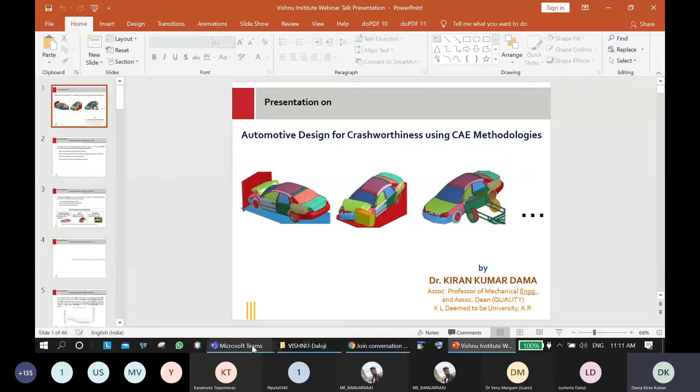Today, I'm here in front of you as a speaker to talk on automotive design for crashworthiness using CAE methodologies. Before starting this session, I'd like to ask a few questions. How many of you are having four-wheelers? Whoever is having passenger vehicles, please raise your hands in your chats. Can I see the responses? Okay, I'm not getting any response over here.

Okay, so as a normal user of a four-wheeler vehicle itself, we should know the safety rating of our vehicle. But especially as a mechanical engineer, we must know the safety standards of our vehicle, which represent the safety of the vehicle in terms of star rating. At the end of this session, we'll come to know what the star rating is and how it would be assigned to any passenger vehicle or any other vehicles.

Crashworthiness of a vehicle can be defined as its ability to protect its passengers and other participants, like pedestrians and other vehicles involved in impact. The car body structure is one of the important vehicle systems that helps in mitigating the impact loads. Therefore, appropriate design measures should be taken while designing the car body structure.

In general, design of a vehicle body structure affects the performance of the vehicle in almost all aspects such as safety, comfort, and fuel consumption. Therefore, various criteria in the field of structural mechanics and aerodynamics are used while generating the design of body structure. This makes the design process highly complex, iterative, costly, and time-consuming.

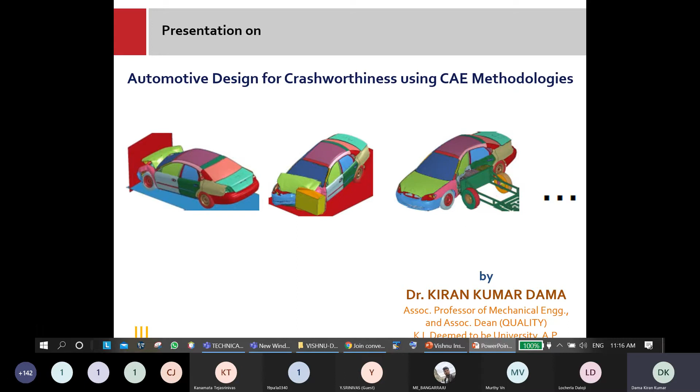Now we'll see how to design these structures. It is necessary for car body structures to possess necessary structural performance under different types of loads and thereby provide passenger comfort and safety during the entire lifespan of the vehicle. The car body should be light in weight. However, its lightweight characteristics should not have adverse effects on structural performance.

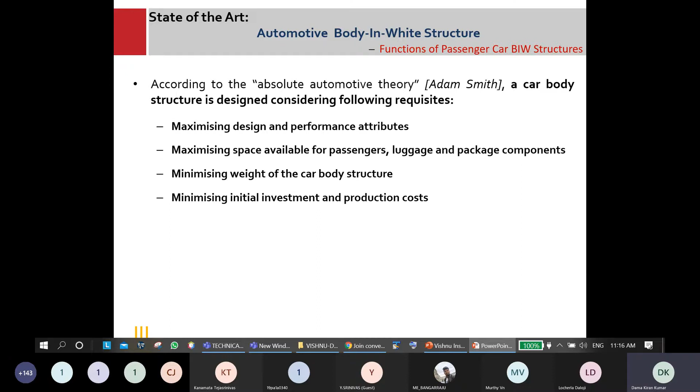The car body structure should provide sufficient space for the passengers and the luggage. The package components should also be appropriately supported by the body. The design of the car body structure should be cost effective considering initial investments and production aspects. By taking appropriate measures during the structural design of car body, safety and comfort of the passenger can be improved considerably. The structural design of a car body is realized considering the performance attributes like crashworthiness or passive safety, noise, vibration, harshness, and durability or endurance strength.

The crashworthiness of a car body structure accounts for the safety of the vehicle, its occupants, and other participants in the event of an accident. In such an event, high dynamic loads are generated within a few milliseconds. The car structure should be able to react to those in this very short duration and provide favorable conditions for the occupants. NVH deals with the static and dynamic stiffness of the car body structure and its sound damping properties, whereas static and dynamic loads are imposed on the car body structure during its operation.

Static loads are mainly of two types, bending loads and torsional loads. Bending loads are exerted, for example, from the self weight of the vehicle and the weight of the passengers and luggage. The car body is subjected to torsional loads, for example, while moving on uneven road, when all tires are not at the same level. In order to sustain these loads, the car body structure should possess sufficient bending and torsional stiffness.

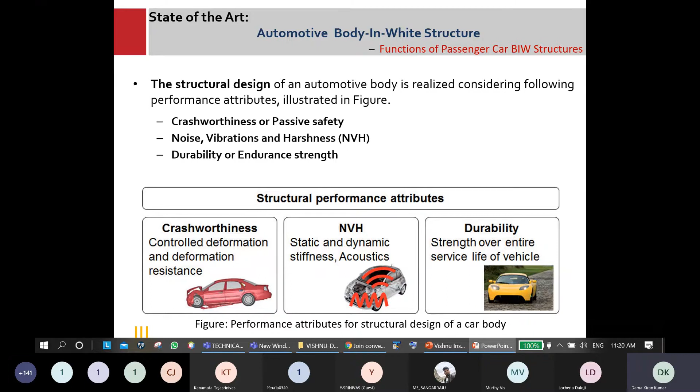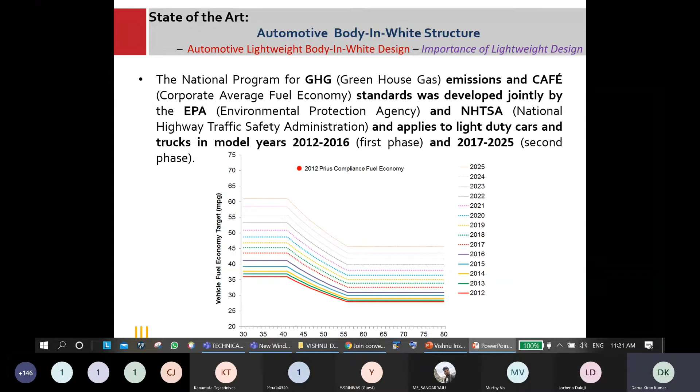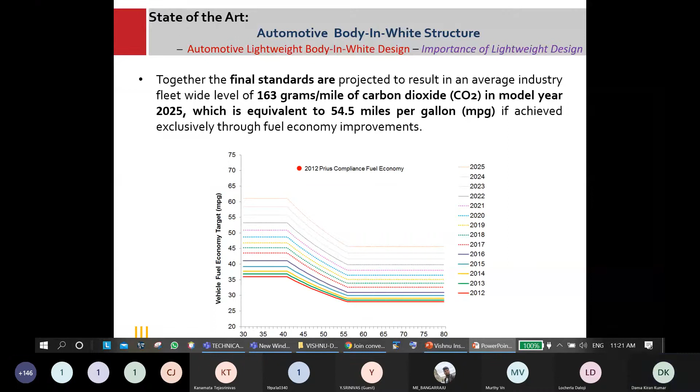Then, the Environmental Protection Agency, called EPA, and the National Highway Traffic Safety Administration (NHTSA) jointly developed greenhouse gas (GHG) emissions and CAFE (Corporate Average Fuel Economy) standards to apply to light-duty cars and trucks in model years 2012 to 2016 in the first phase and 2017 to 2025 in the second phase. The final objective of these standards is to achieve 163 grams of CO2, which is almost equivalent to 54.5 miles per gallon, by 2025.

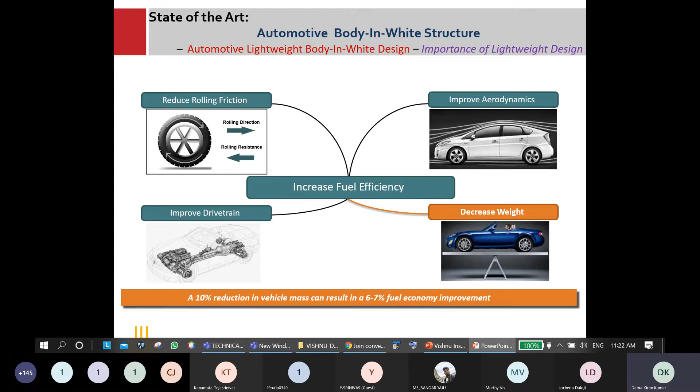So we have a lot of methodologies to increase fuel efficiency, like rolling friction reduction, aerodynamics improvement, and drivetrain improvement. Most researchers proved that weight reduction is the best methodology to achieve more fuel efficiency, and that a 10% reduction in vehicle mass can result in 6 to 7% fuel economy improvement. Because vehicle mass is a fundamental part of vehicle CO2 emissions, and the ultimate vehicle load, that is road load, is tied directly to the vehicle weight, reduction in weight causes a reduction in required energy and thus a reduction in CO2.

Generally, the lightweight design methods can be classified into three categories as per researchers, depending on the perspective followed, namely strategic, constructive, and principal lightweight design. The strategic lightweight design represents various strategies such as use of lightweight materials, application of optimum geometry, etc., which can be employed for constructing lightweight constructs.

The constructive lightweight design suggests various construction approaches to resolve the weight-related issues of vehicles and their components. And the principal lightweight design gives priority to the fundamental aspects of the components. A suitable lightweight approach is chosen in such a way that none of the functions of components are compromised due to the reduction in its weight.

Although a basic distinction exists in these three categories, a particular lightweight design method can often be classified under more than one of the above categories. Different methods applied for lightweight design of vehicles are material lightweight design, production lightweight design, shape-based lightweight design, conceptual lightweight design, and conditional lightweight design.

In material lightweight design, using lighter material variants, the weight of the components can be reduced. The alternative materials to be employed are chosen considering the material cost, the production cost, and manufacturing possibilities. Additionally, care is taken that functional characteristics of the components are not adversely affected. Generally, changes in materials are accompanied by changing the geometry and the construction concepts.

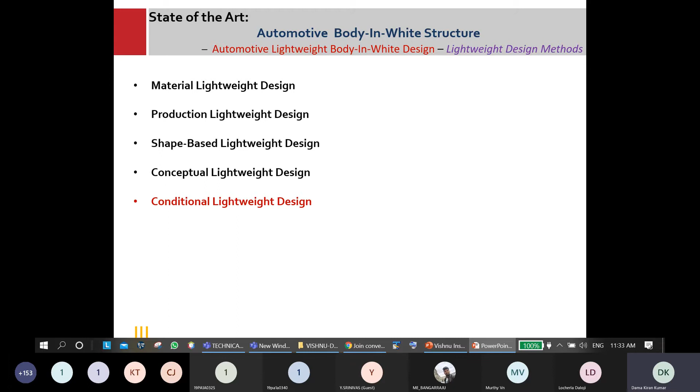So, lightweight design of vehicles and car body structures provides advantages in many ways. It also has some limitations. Reducing the weight of the car body may have adverse effects on the strength, stiffness, and safety performance characteristics of the body structure. Using alternative materials for lightweight design increases the costs of manufacturing. If these increased costs are not compensated by the reduction in fuel consumption or by increased vehicle performance, the overall cost of the vehicle may considerably increase. In order to make optimum and efficient use of alternative materials, suitable and cost-effective manufacturing and joining techniques should be available.

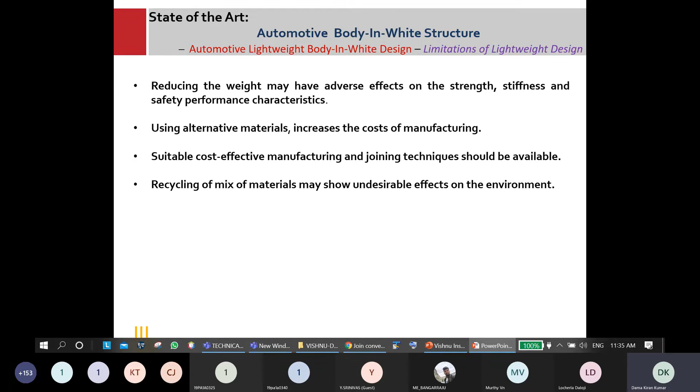Recycling of car body structures constructed using a mix of materials may show undesirable effects on the environment. In order to use lightweight design methods effectively without any adverse effects on the performance of the vehicle and on the environment, conducting a thorough risk analysis is always recommended. Assessing the performance and customer requirements can help in identifying weight reduction potentials and in choosing suitable design strategies for the body structures and other vehicle systems.

A crashworthy car body structure is so conceptualized as to absorb considerable amounts of the impact energy by deforming in definite areas and thereby reduce the deceleration experienced by its passengers to survivable levels. The non-deforming areas of the car body structure are designed as a stiff survival space for the passengers. Various criteria such as deformation pattern, deceleration paths of the vehicle, different biomechanical criteria defined for passengers, etc. can be used for assessing the crashworthiness of vehicles. Before going into crashworthiness in more detail, we'll just see a small video where a Maruti Suzuki Baleno car has been crash tested by Euro NCAP, the European New Car Assessment Programme.

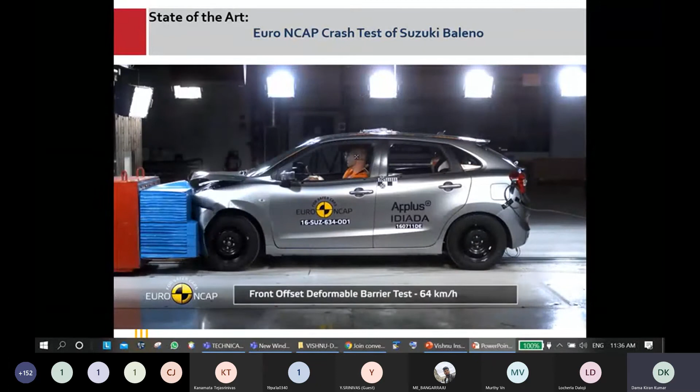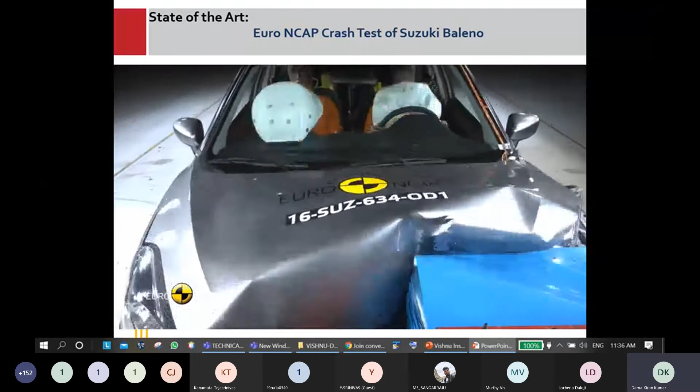This is the test of frontal offset impact barrier. Here the deformable barrier is used. Just remember that deformable offset barrier; I'll let you know what it is exactly in future slides. These are the child dummies placed inside, and male and female dummies also would be placed inside that.

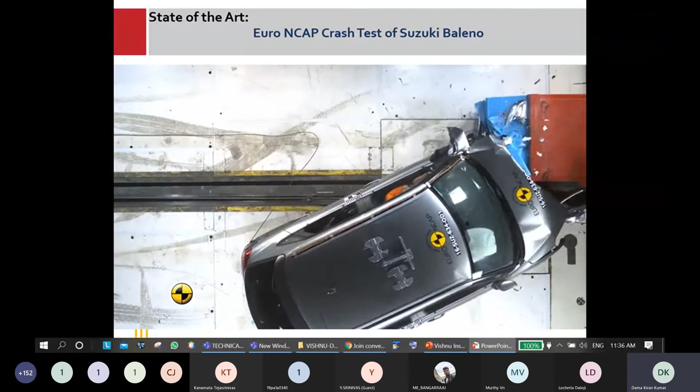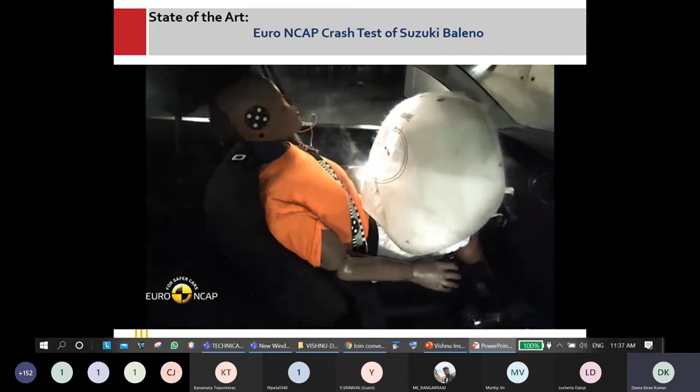This is the physical real test conducted by NCAP, and this is full frontal rigid barrier test. This would be conducted at 50 kmph as per norms. And for this test, our Baleno got 3-star rating. See, this video is in slow motion. It's not exact speed.

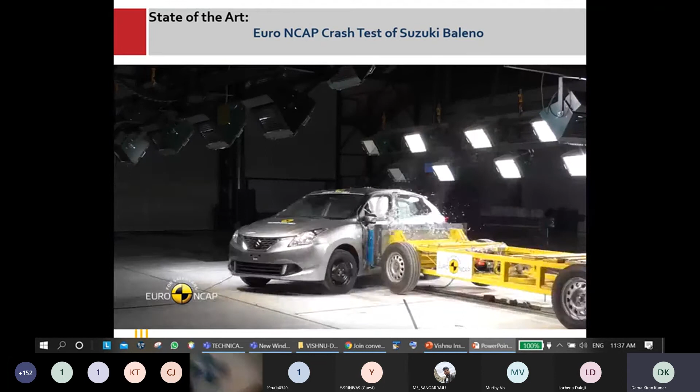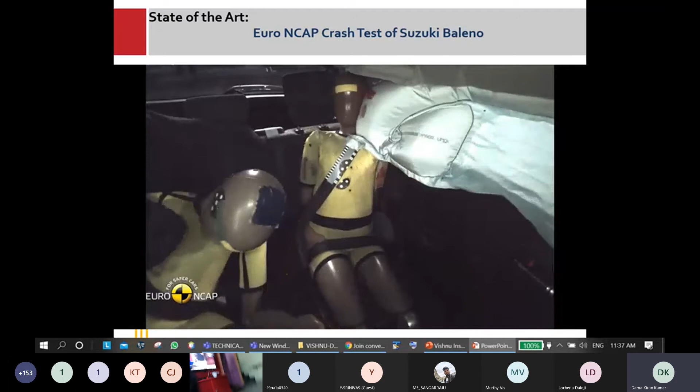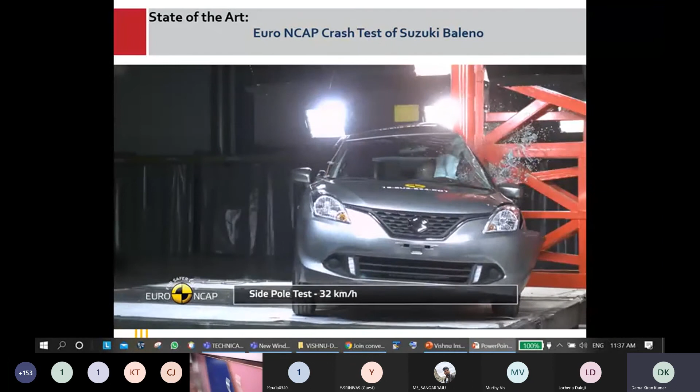This is side impact. Here the barrier would be a movable barrier, the vehicle would be in static position, and the barrier speed would be 50 kmph. This would be called as side pole test, where the vehicle would be moved and the pole would be in stationary position, and the vehicle would be moved with 32 kmph velocity.

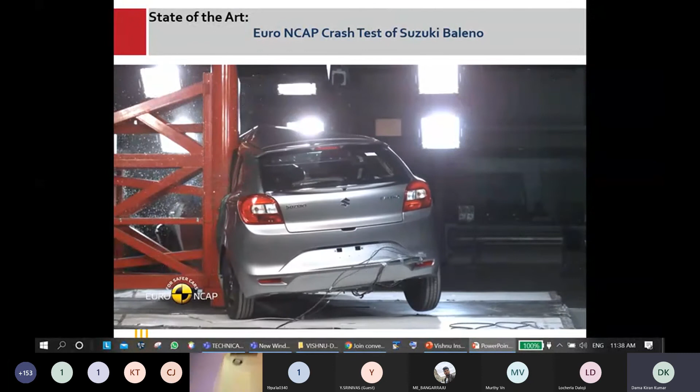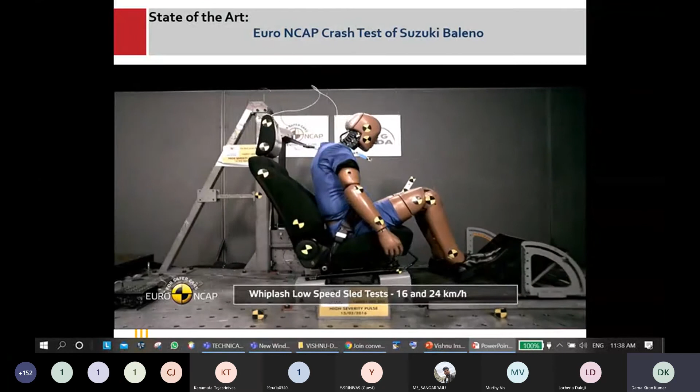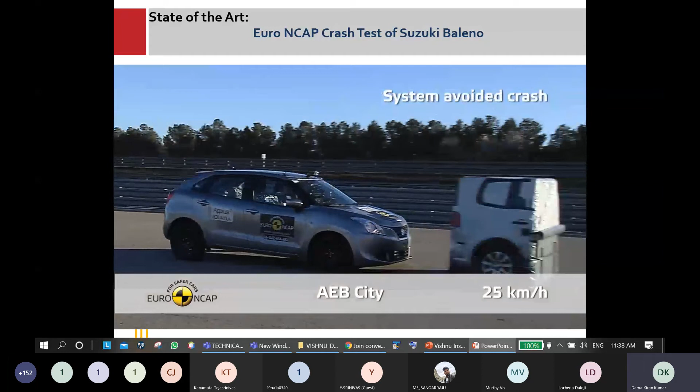This is called as whiplash test for occupant and neck injuries and all the things. This would be for pedestrian safety, head impact test, and this is for leg impact test for pedestrian safety. This is also leg impact pedestrian safety. And this vehicle with auto safety braking system would be tested.

See, now we'll move into principles of crashworthiness. Why I showed that video is once you see that physical video, you can come to know what is crash. You'll have some glance about that. Then you can catch whatever the statements I say, right?

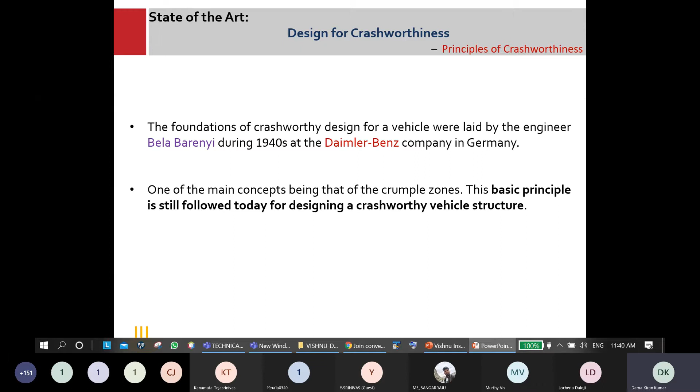The foundations of crashworthy design for a vehicle were laid by the engineer Bela Barenyi during 1940s at the Daimler-Benz company in Germany, independent of the developments in USA. He developed various concepts for achieving passenger safety, one of the main concepts being that of the crumple zone. This basic principle is still followed today for designing a crashworthy vehicle structure.

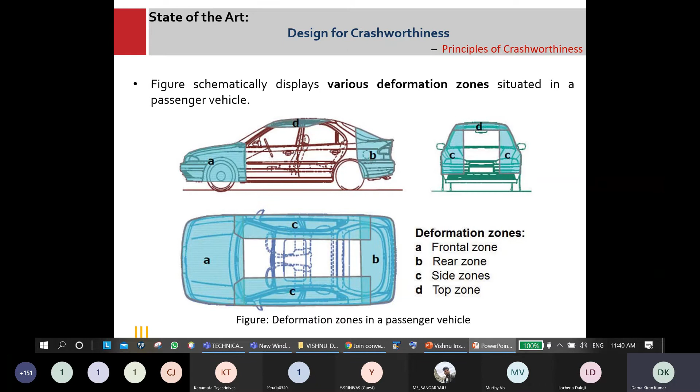Here a stiff passenger compartment is constructed and it is surrounded by predefined energy absorbing zones called crumple zones or deformation zones. These zones are situated at the front, rear, both sides and top region of the passenger compartment. A deformation zone can be divided into primary and secondary deformation zones. The primary zone consists of the main energy absorbing structures, whereas the secondary zone is a structural interface between primary zone and the stiff passenger compartment.

The secondary zone acts as a stable platform for the progressively deforming primary zone and transmits the load to passenger compartment. The secondary zone can also be designed to deform in a controlled manner in order to reduce the energy flowing into the passenger compartment. However, the load levels sustained by the secondary zone are kept higher than those sustained by the primary zone, thereby ensuring that the components in the primary zone deform before the components in the secondary zone.

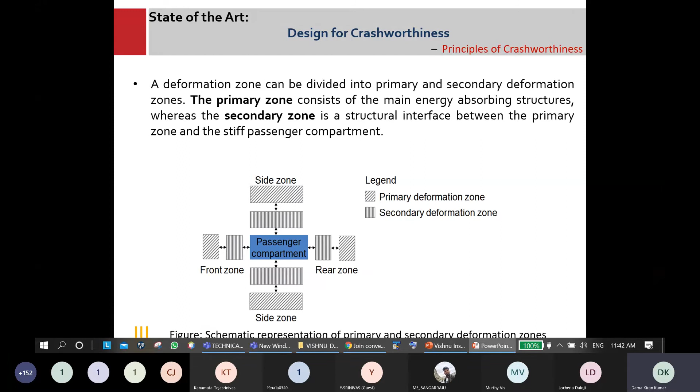The passenger compartment surrounded by the deformation zones provides survivable space for the passengers. The deformation zones, together with the passenger safety systems such as seat belts and airbags, help in reducing the deceleration experienced by the passengers. Various methods have been developed and used over the years to analyze and optimize the crashworthiness of vehicles. We will see some of the most popular methods and their advantages and disadvantages.

The most popular method in use today for analyzing crashworthiness of vehicles is computer-aided nonlinear finite element method. According to this method, a continuum is divided into finite number of subsystems called finite elements. The state of the whole continuum can thus be described using a finite number of parameters such as displacement, forces, etc. at each node of the FE, resulting in a set of equations of motion. These equations are solved using numerical techniques and thereby an approximate behavior of the continuum under the given loading conditions is studied.

Owing to the continuous improvements in computer hardware and software as well as in the numerical structural mechanics, the FE method has become more efficient and accurate since its introduction. Software such as Radioss by Altair Engineering, LS-Dyna established by LSTC, that is Livermore Software Technology Corporation, now acquired by ANSYS, and PAM-Crash by ESI Group, etc. are used in today's automotive industry to analyze the highly nonlinear and dynamic problem of vehicle crashworthiness. Depending on the phase of the design, the complexity and size of FE model varies considerably.

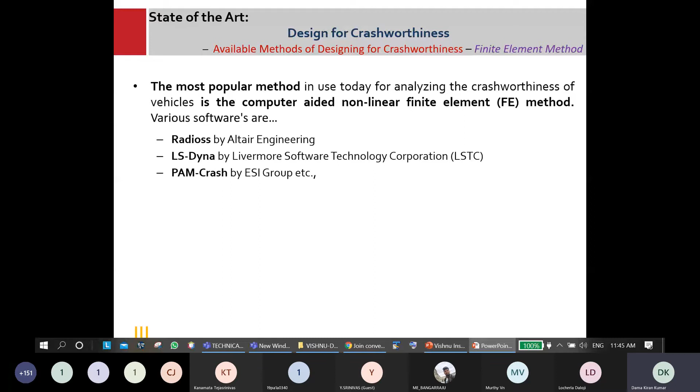Moreover, due to the detailed input data needed for building an FE model, such as material and geometry data, these models prove to be less useful in the concept design stage of a vehicle. In this stage, the design concept changes quite often and different design concepts are evaluated against each other for their crashworthiness. Therefore, considering the efforts needed to build a single FE model, this method is not always suitable for the concept design phase.

Another analysis method, primarily used for analyzing vehicle crashworthiness before the advance of the FE method, is the lumped mass spring method, also known as LMS. These LMS models are simple models that approximate a vehicle as a one-dimensional model consisting of a system of springs and lumped masses. The springs mainly represent the deformable structures of the vehicle, whereas the lumped masses represent non-deformable components of the vehicle. The load deflection characteristics of the springs are determined either from tests of the respective deformable structures or from their validated FE models.

The LMS models prove to be very useful in designing vehicle derivatives or upgrading the body structure, where the crash performance results of the basic model are available either in the form of tests or FE simulations. However, for designing a completely new vehicle structure, the LMS models are not beneficial since in this case the spring characteristics are unknown. The accuracy and reliability of the LMS models heavily depends on the experience, knowledge, and understanding of vehicle crashworthiness of the design engineer.

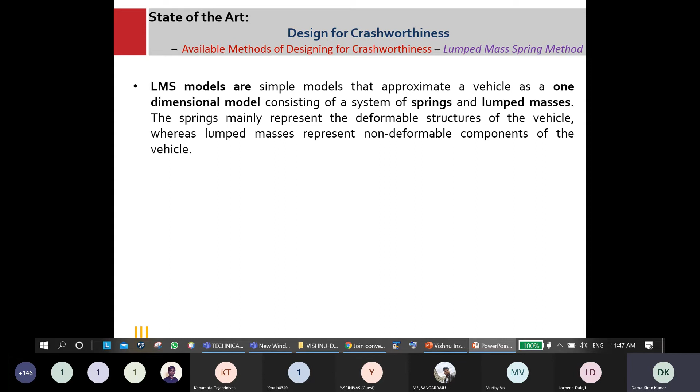The simplicity of LMS models and the flexibility of FE models is combined into so-called hybrid models by researchers in an attempt to overcome the limitations of both methods. The most common approach followed by various researchers is developing a collapsible beam finite element and integrating it into FE software. Different concepts and formulations are developed and used by different researchers, such as elastic plastic beam, super collapsible beam element, super folding elements, and super beam elements, etc. The formulations of these elements follow various simplified approaches ranging from purely analytical to purely experimental.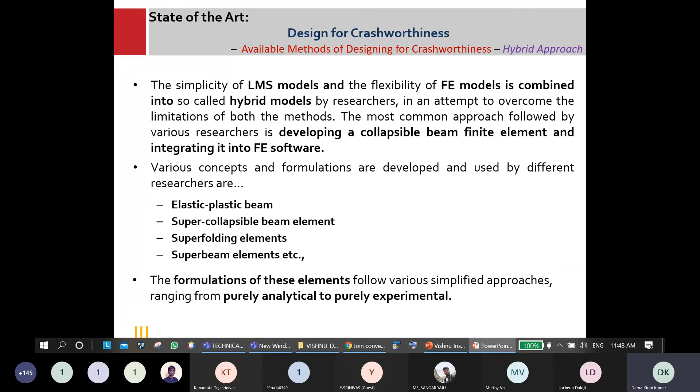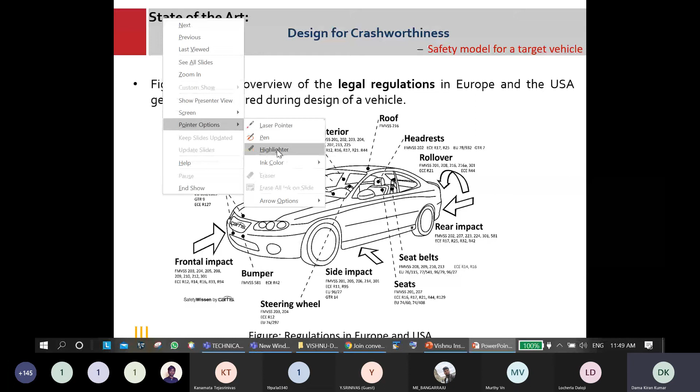In order to construct a safe vehicle, it is advisable to consider certain crash scenarios such as frontal crash, side crash, rear crash, and roof crash during the design of the vehicle. This slide gives some details of legal crash scenarios and consumer protection regulations relevant for passenger vehicles. So you can see different impacts over here. If we consider frontal impact, it has different scenarios like FMVSS 203, 204, 205, 208, 209, 210, 212, 301, ECE R12, different regulations only for frontal impact.

And for bumper impact, we have FMVSS 581 and ECE R42, whereas we are using ECE R14, ECE R12, ECE R42. And for pedestrian protection, we have some legal regulations, European regulations 78/2009 and ECE R127. And for rear impact, we have FMVSS 202, 207, 223, 301, ECE R17, R25. And for seats also we have some FMVSS, and for side impact also we have some regulations. Different legal regulations were incorporated in Europe and USA.

Even in India we are following some legal regulations, whatever are available in Europe. We just saw that for the Baleno crash test. We conducted that in India, but we followed European regulations. Based on country regulations, we can adopt all these legal regulations. See, whenever we say legal regulation, that has a certain structured procedure. We need to strictly follow that.

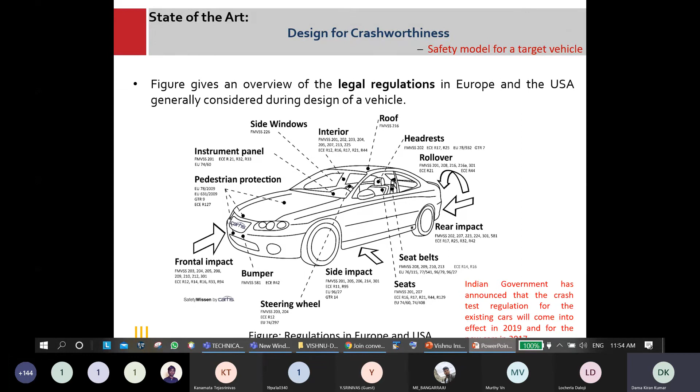Are there some legal regulations to be incorporated for CAE analysis? This is one of the sample regulations. Options, laser pointer. Yeah.

Earlier we just went through frontal offset impact, right? That's called ECE-R94. Frontal offset means the front portion of the vehicle should be offset with 40% touching this barrier. If it is a deformable barrier, that barrier should be deformed. As per the naming convention, ODB means offset deformable barrier. It is offset with 40% touching the vehicle and 60% open.

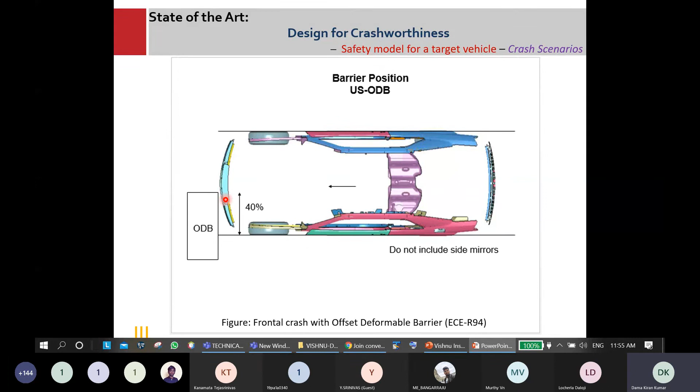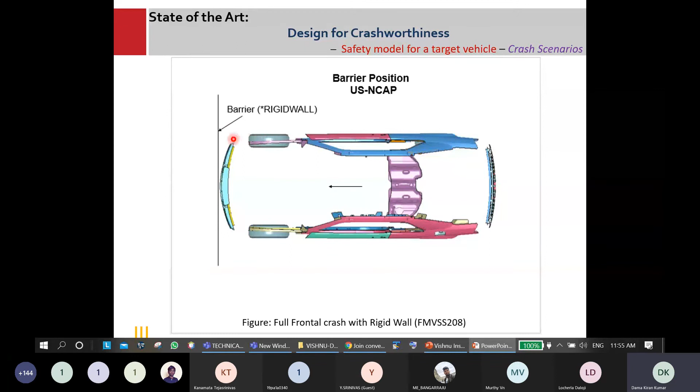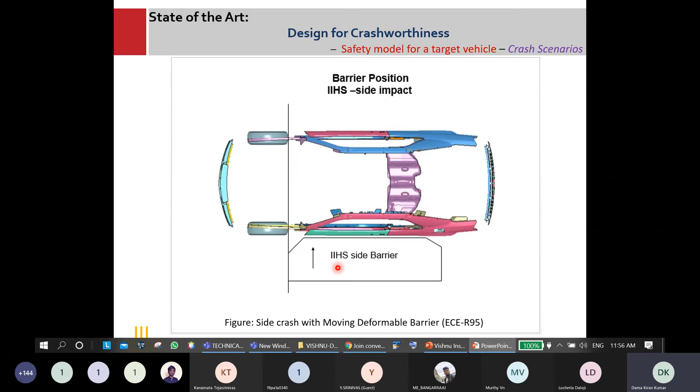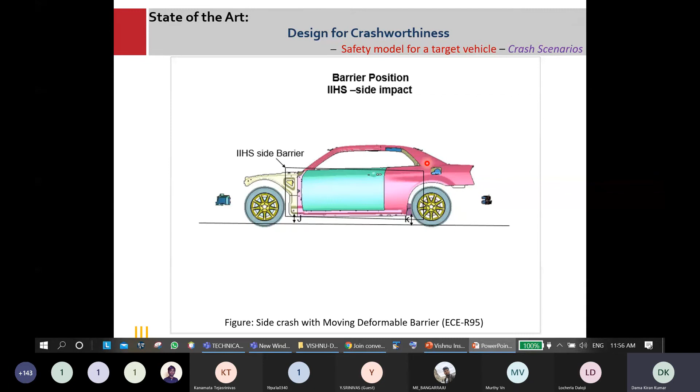This is the side view of that side deformable barrier test. This one is the barrier. It hits exactly the B pillar. You know the pillar, right? This would be called the A pillar, the pillar in between the front door and back door would be called the B pillar, and the pillar behind the B pillar would be called C. If it is an SUV, we will have a D pillar also, right? This barrier would be positioned to hit the B pillar.

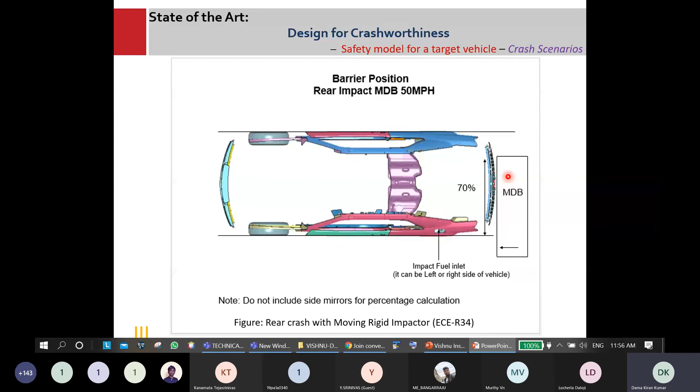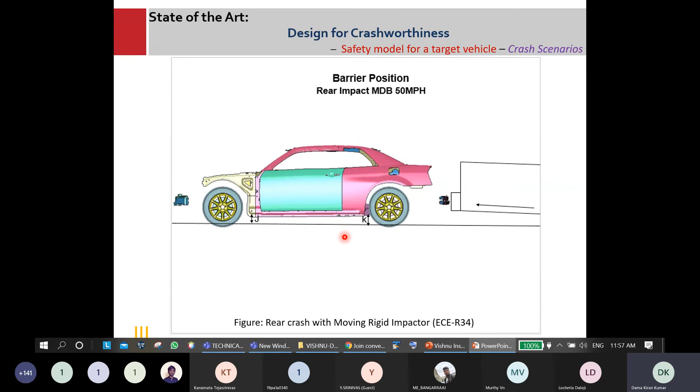For frontal impact, if we consider FMVSS 208, that type has a rigid barrier, the overlap should be 100%, and the velocity of the vehicle should be from 32 to 56 kmph based on micro size passenger vehicle and mid passenger vehicle. As this Baleno is a mid-size passenger vehicle, it has to be conducted at 56 kmph. Micro compact cars means like Nanos, micro cars.

And in this frontal impact FMVSS 208, we have 0 degrees and 30 degrees. This means the frontal impact would be at 0 degrees, full frontal with full contact, and 30 degrees oblique. And ECE-R94, in this we need to use a deformable barrier, and the overlap should be 40%. 40% of the vehicle should contact the deformable barrier, the barrier dimensions should be 1000 by 450 by 650, and this should happen at 56 kmph.

And for pole front impact, the pole should be rigid, the dimension should be 250 mm, and the velocity of the vehicle should be 30 kmph with 0 degrees oblique. That one could be at any angle.

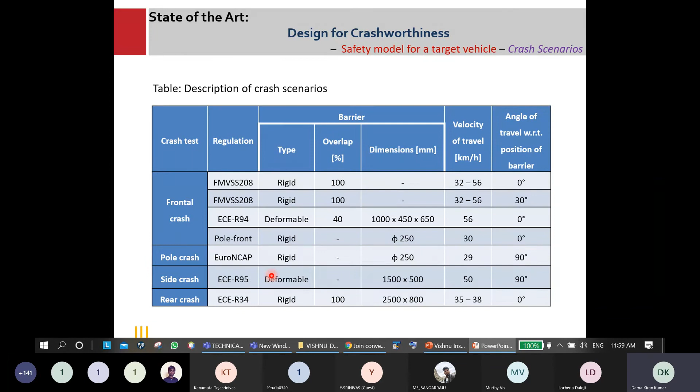And if we see the physics behind this, just assume that two vehicles are in collision, vehicle 1 and vehicle 2. As per the energy equations, we know the law of conservation of energy, right? Based on that, the total initial kinetic energy should be equal to the summation of translational kinetic energy after impact, rotational kinetic energy after impact, and energy of deformation. We know that energy can neither be created nor destroyed. So the total kinetic energy before should be the summation of this. This is the physics behind any crash scenario.

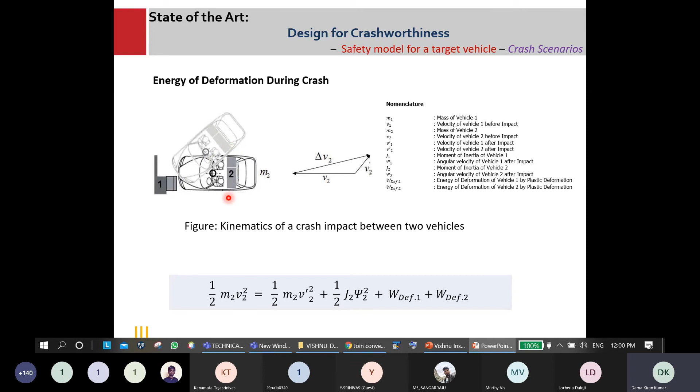Just assume that if one of the vehicles is not a vehicle, it's a barrier, then this conservation of energy will be converted into this. This one, we can imagine as the barrier. It won't have any initial kinetic energy. We'll have only the kinetic energy of the moving vehicle. This total kinetic energy of the vehicle would be the summation of those energies, right? If we have two vehicles, the conservation of energy will be like this, and if we have only one vehicle, the crash scenario energy conservation will be like that.

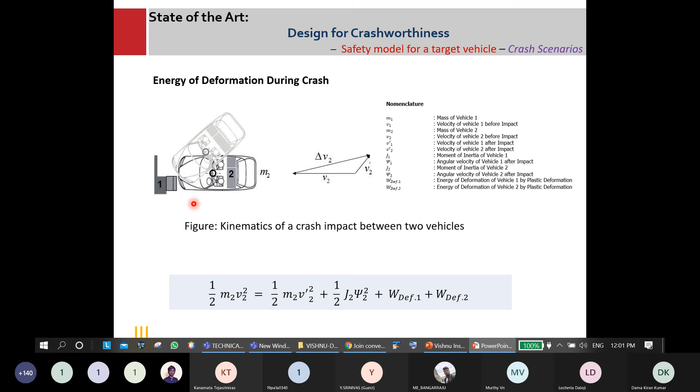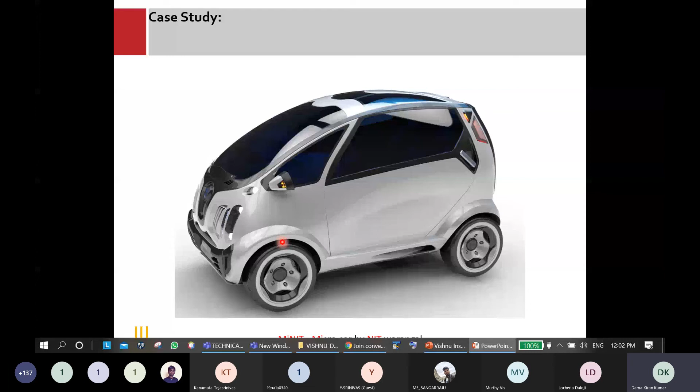I don't want to show the BMW work I did. This is a sample styling case, which I got from one of the automotive industries incorporated in the USA. This is an FE model of a micro, 2-passenger vehicle. Just imagine that it got a 5-star rating, almost equivalent to the high-end BMW car. We have very little crumple zone. It seems like a Nano car with a facelift, right?

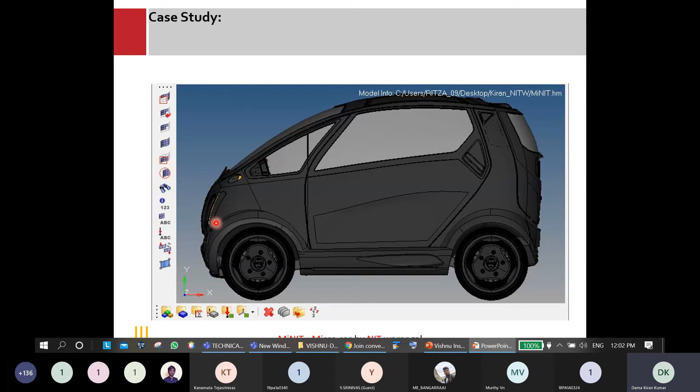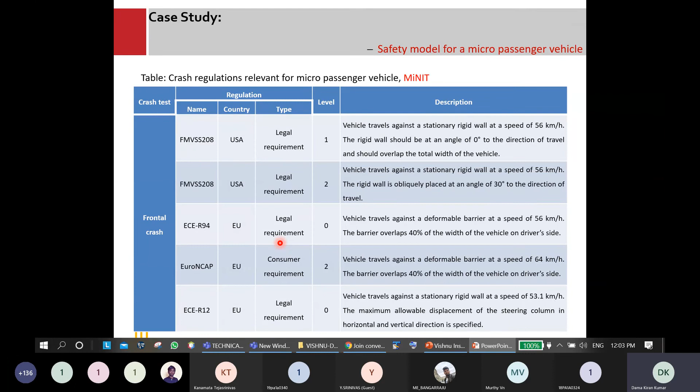And we followed a 3-level crash test for that. We assumed level 0 is nominal, minimum, level 1 is mid-range, and level 2 is high-end range. And we classified everything based on this. So you can observe that if you need to pass legal regulation, it has to pass the level 0 test, those are ECE R94 and ECE R12, and also pedestrian safety.

Nowadays pedestrian safety has become more crucial. The central government even made a regulation to avoid metal bumpers on vehicles. Why? Because if we add metal bumpers here, pedestrian safety will be lost. The basic concept of this bumper is pedestrian safety. Observe that older vehicles like the Jeep have metal bumpers, right? Whereas new vehicles have a plastic bumper panel, with foam and structures inside. Why? Because whenever our vehicle hits a pedestrian, the pedestrian should not be injured more. And consider that the pedestrian hitting speed is a maximum of 40 km/h. It should not be more than that, right?

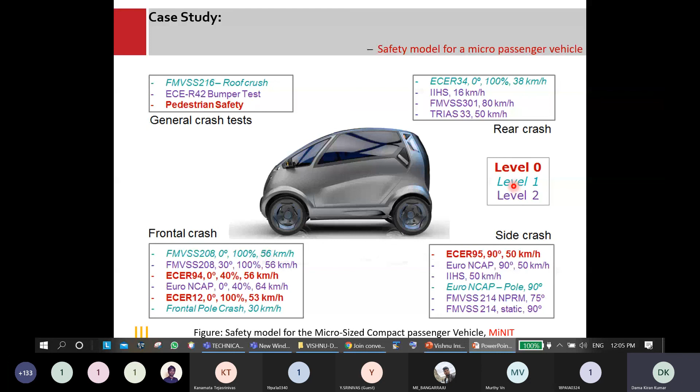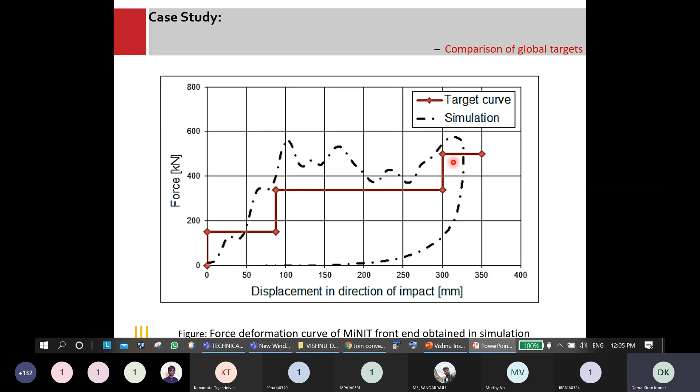Yeah, that's all my presentation. If you have any queries,